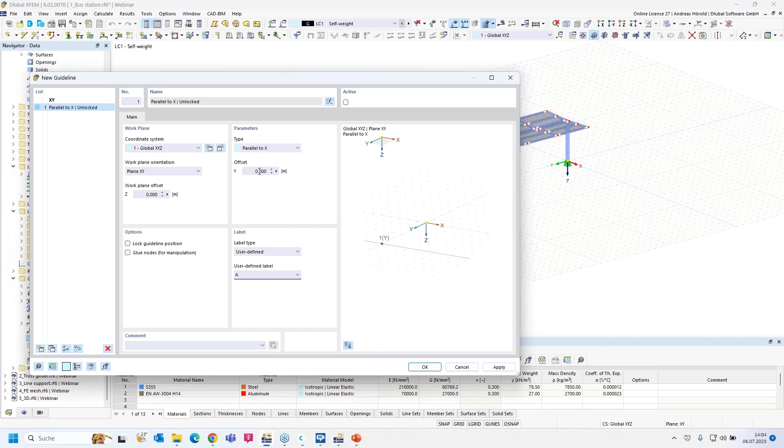Okay, we start with the first guideline. We call it A, parallel to X, and we start with an offset of 0. Apply, and you can see in the RFEM window that the first guideline is created. We activate it, and then we copy the guideline, and we have to change the offset.

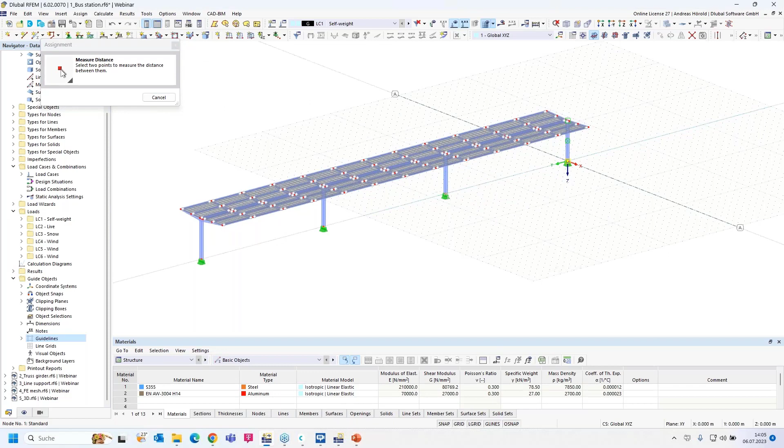Let's measure the distance between the two columns here - okay, 18 meters - and we have to rename the guideline. Apply. Okay, then we create the other guidelines with the same workflow, 36 meters, and we rename the guideline.

Apply. So, and then the last guideline - I change only the offset and the name. Okay, so all the guidelines in the X direction are created.

Now you can see the distance between the name of the guideline and the node is very far. You can change that - for example, when you change the grid, here by a right click you can press edit, or I leave the dialog and show where you can find it as well, under tools, work plane, grid, snap, and so on. Okay, then you can enter distances here.

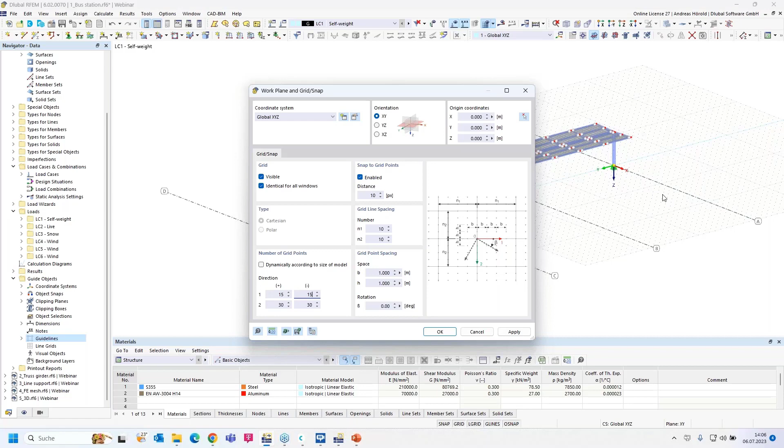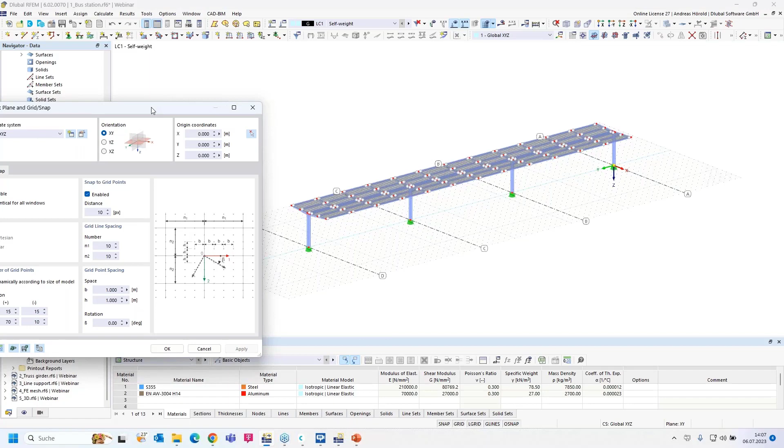15 plus and 15 minus in the X direction, in this direction, and for example 70 and 10 in the Y direction. I apply, and you can see the name has been moved to near the node. You can also check dynamically according to size of model - let's do that - and you can see that the number of grid points are created automatically.

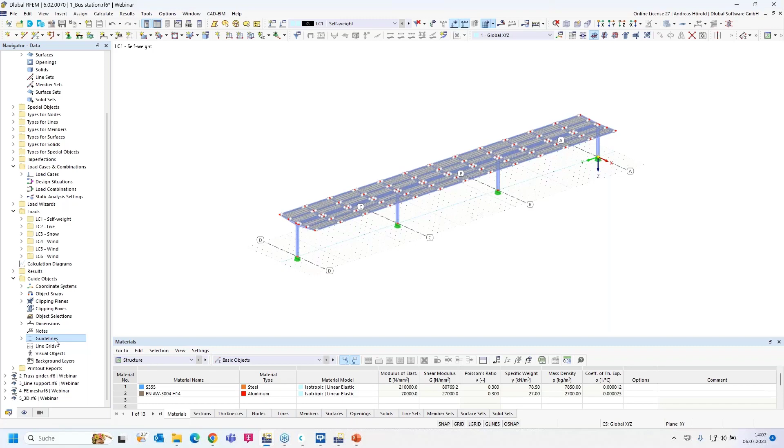Now let's create the last guideline in the Y direction. I create a new guideline, parallel to Y, offset 0, and a user-defined name - I name it 1. Apply that. Now all is okay.

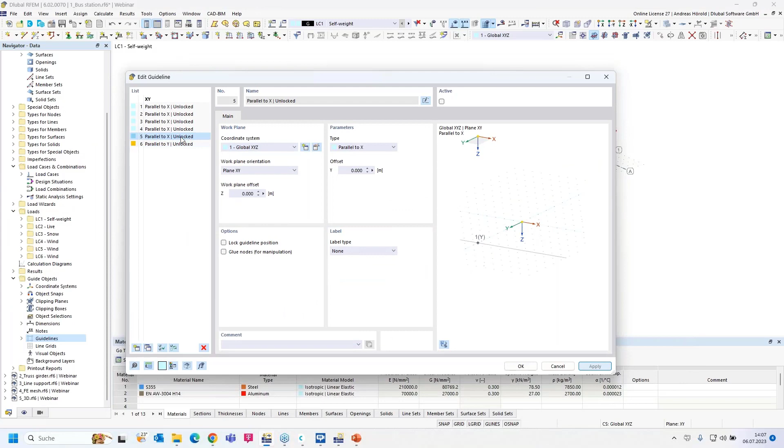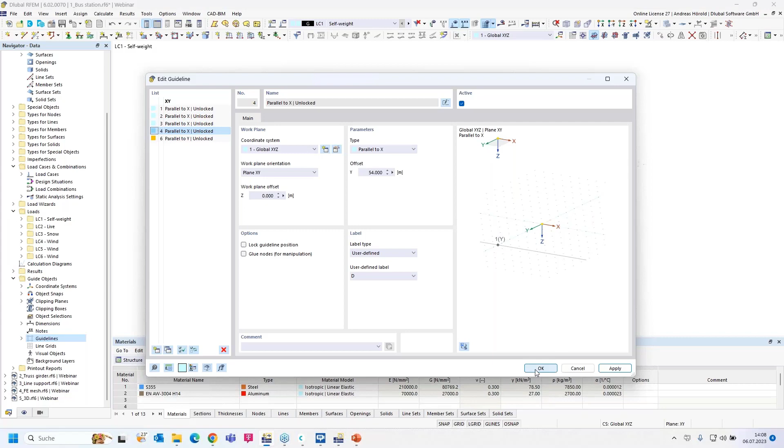No, this one is not correct. Now you can move, copy, or delete all the lines here, or certain lines. Now our guidelines are created - just an example. So then we turn to the next model and the next question.

Next question is: I came across the area of load application setting in the load wizard. How does this setting affect the magnitude of the load in my model? So this is a load that has been created with the load wizard. I double click on it, and you can see that dialog.

And how you can create such a load, I will show that. First, you have to select in the base data here, left at the top, under add-ons, the load wizard must be activated - but this is a default setting. The combination wizard and the load wizard are selected by default.

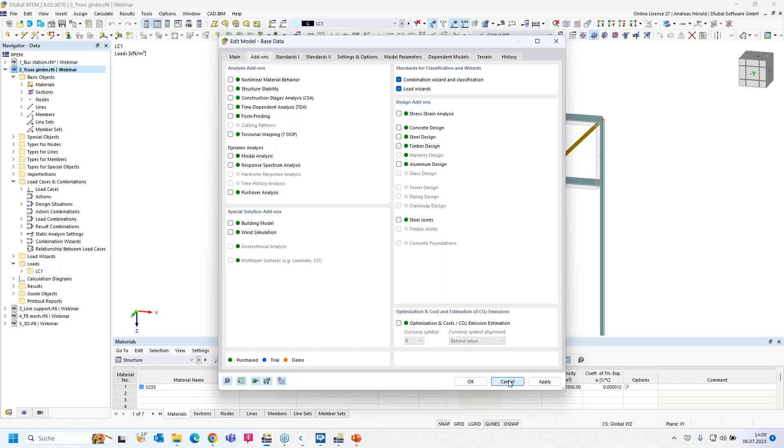And then here on the left side at the top, insert, there are the load wizards. There are different load wizards - member load from area load wizards, for example. This is the load that I created before, which you can see in the model. There are also the snow load wizard and the wind load wizard, for example, and other wizards.

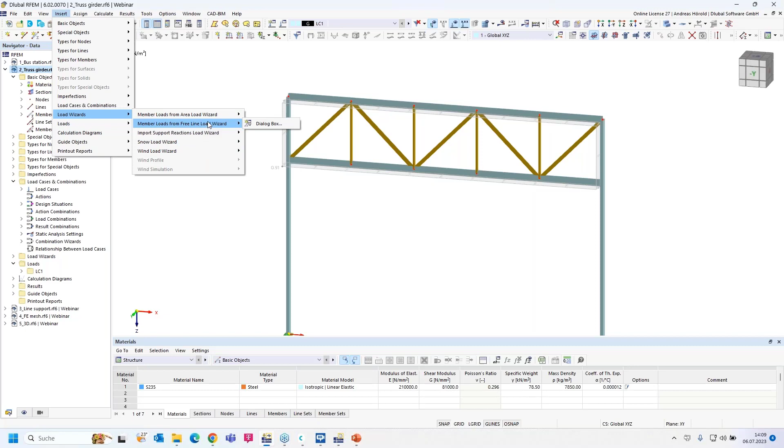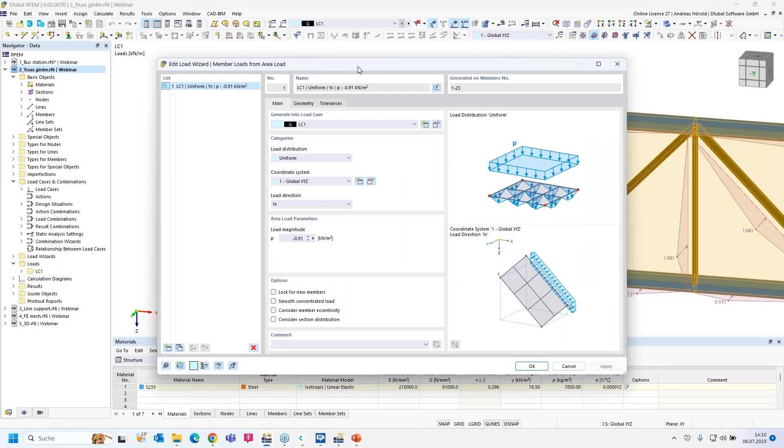I double click on it, or let's display it separately. Now with a right click, I can display the loads separately. And now I double click on the load, and I open the dialog. Under geometry, you can see this setting: fully closed plane.

The complete plane - where there's, for example, a plate or trapezoidal sheet over the members - and all members get a load, and the wind can affect the full area here. So, if you want only the members to get a load, only this small area, then...

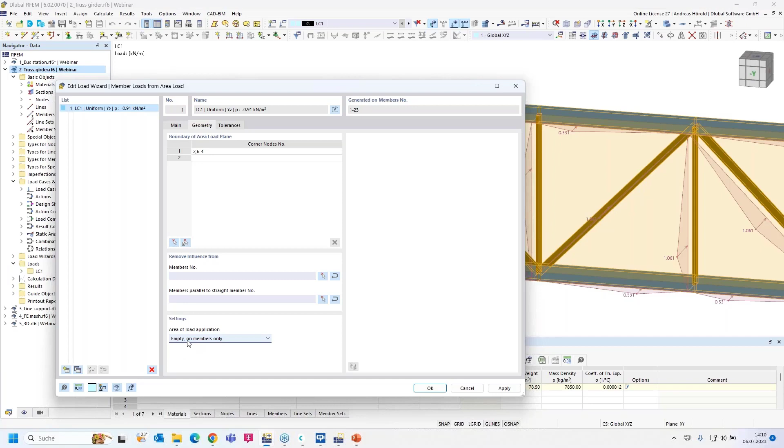...you have to select 'empty on members only.' We can see that at the moment the vertical and the diagonals get a load of about 1 kilonewton per meter, and if I apply that, you can see that the load is, or has been, decreased. Only the members are affected by a wind load.

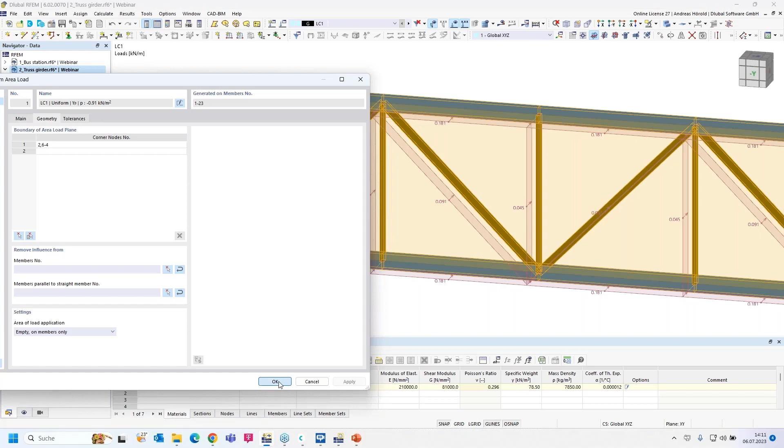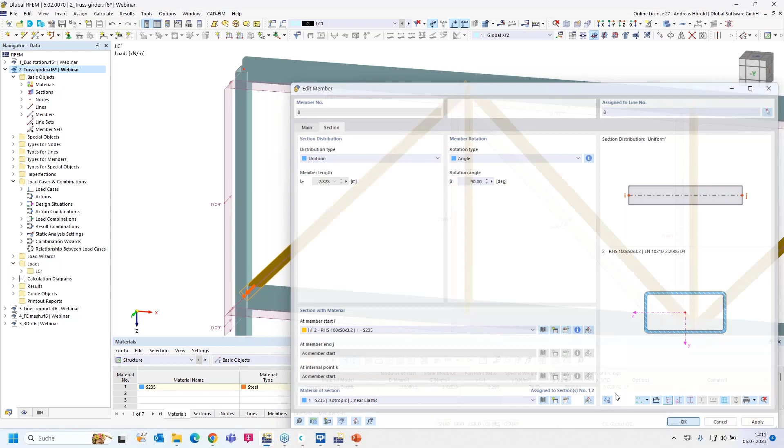So, if you, for example, change that member - at the moment the width is 10 centimeters or 100 millimeters - and if I rotate the section, for example 90 degrees, you can see the load has decreased from 0.1 for this diagonal, and now it's only half of this value.

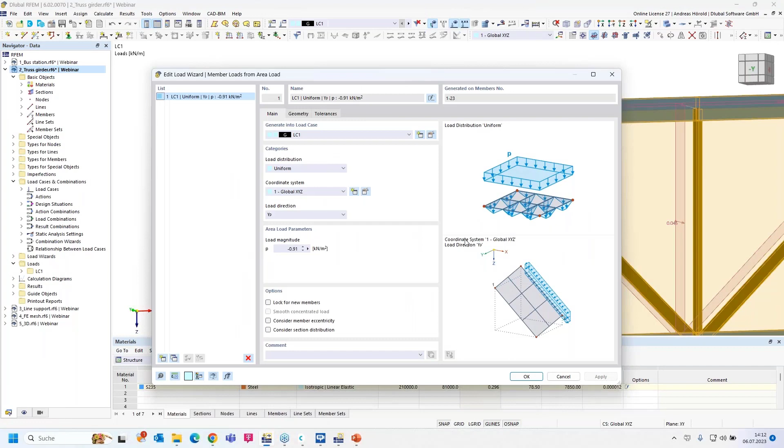Okay, that's the setting. I changed that back, or I press undo, and you can see now the load is 0.1, or about 0.1. And I'll do another change.

Imagine that, for example, a trapezoidal sheet spans from the lower beam to the upper beam, and only these beams are affected by the load, or support the trapezoidal sheet. Then you can remove the influence from members parallel to straight members. I select all 3 members, and all members parallel to these 3 members don't get a load.

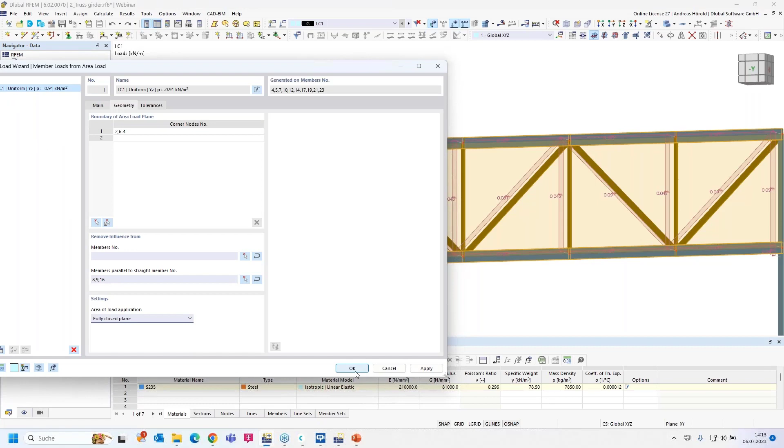Let's try that - fully closed plane. Okay, so now that's the effect when a trapezoidal sheet spans from the lower to the upper horizontal beam.

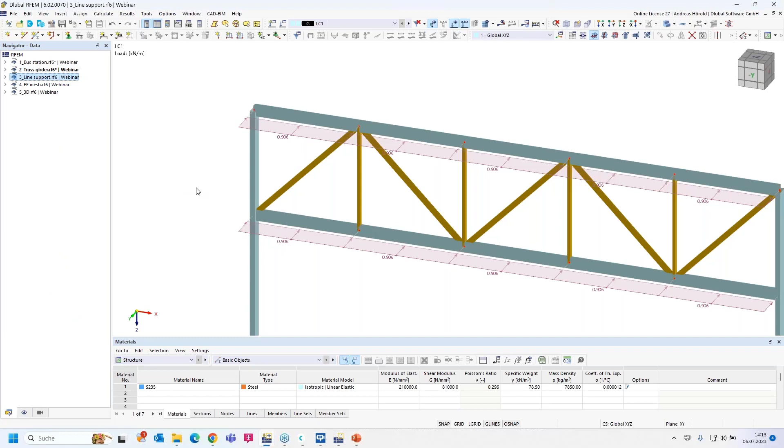Let's turn to the next model and the next question. A surface model, a concrete slab from a building, for example. And the question is: can I get the program to calculate the spring of a wall for line support without modeling the wall?

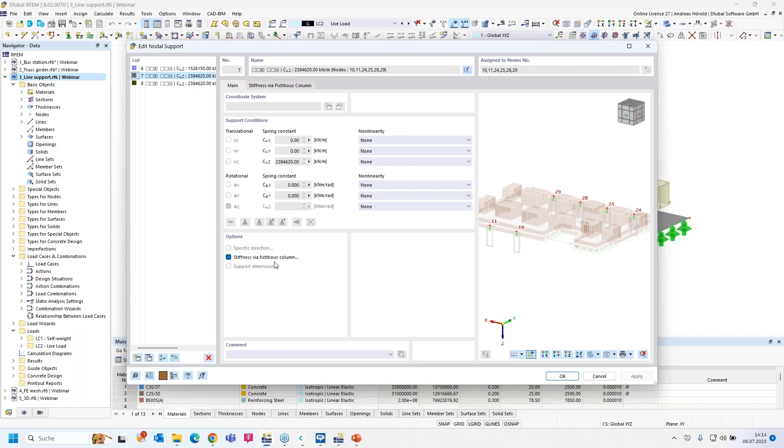In an earlier webinar, we showed a similar function or feature for the nodal supports. Let's double click on this nodal support, and when I press the edit button, you can see where 'stiffness via fictitious column' is selected. And when I turn to this dialog...

...I can see the model is supported by elastic surface foundation, elastic nodal support, and so on. You can enter dimensions, the height, and so on. Then if the column head is hinged or semi-rigid, and when you change that, the values for the springs are changing.

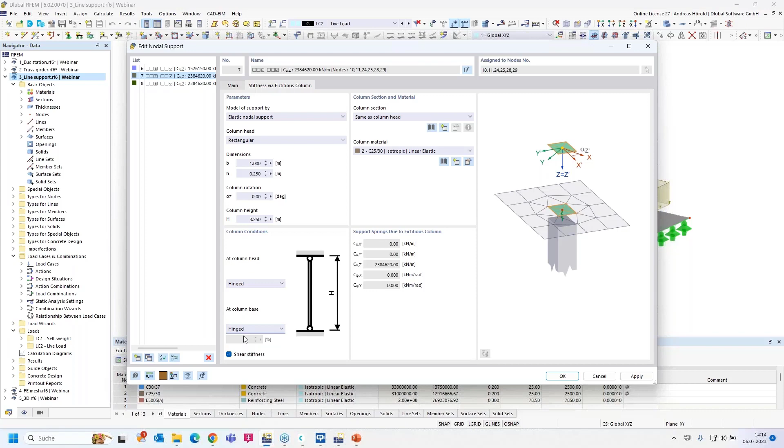Okay, so I leave the dialog, and we have got a similar function for the line supports. I double click on the line support and edit all the used line supports. Now you have to check the stiffness via fictitious wall. In the preview, you can see the walls already.

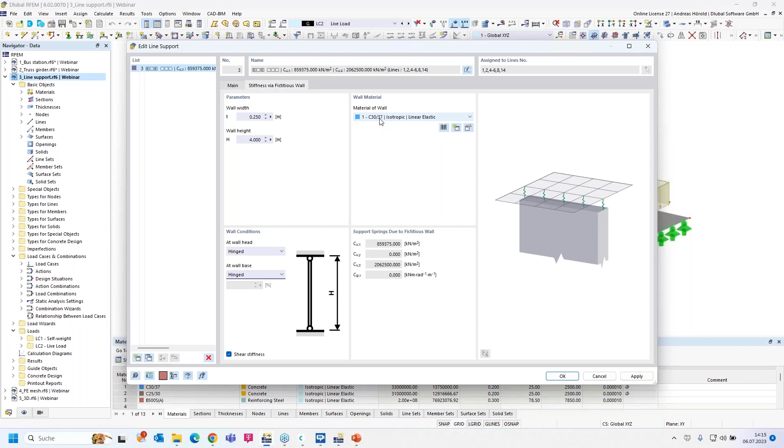So then you can enter a thickness of the wall, a wall height, and whether the wall head is hinged or rigid. Also for the wall base, you can enter a material. I'll leave the concrete material as it is at the moment, and you can see, as I mentioned, the considered wall in the preview.

Okay, and now you can see also springs for the line supports here, and this can avoid or smooth singularities in the FE calculation. That's the advantage.

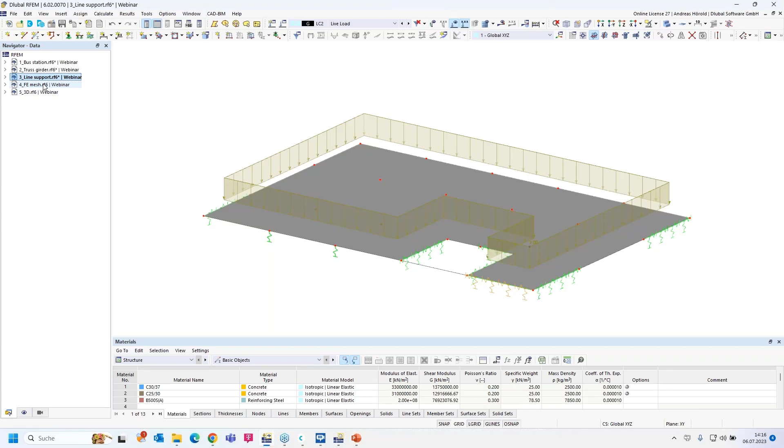Okay, that should be all to this question and to this model. We turn to the next model and the next question: how can I create multiple FE elements across the thickness of elongated thin solids without having to create an extremely fine FE mesh? At the moment, you can see a steel plate here with a thickness of 20 millimeters.

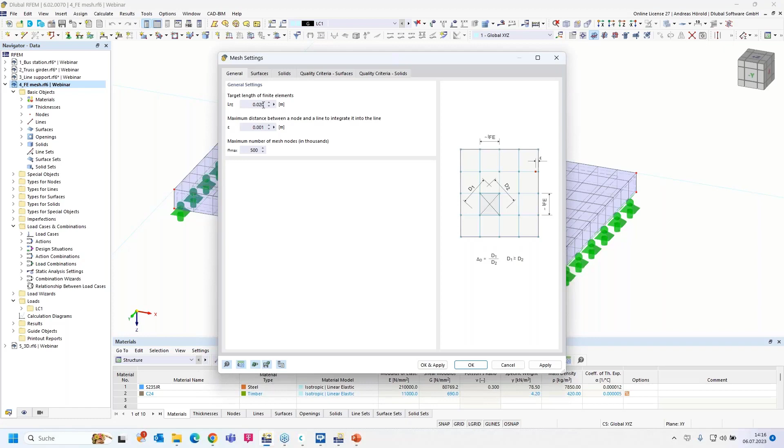I can go to the FE mesh settings. The FE mesh size is 2 centimeters, 20 millimeters, that's the thickness of the steel plate. And you can see for the width and the length, the size of the FE mesh is quite okay, but not for the height—there's only one FE mesh.

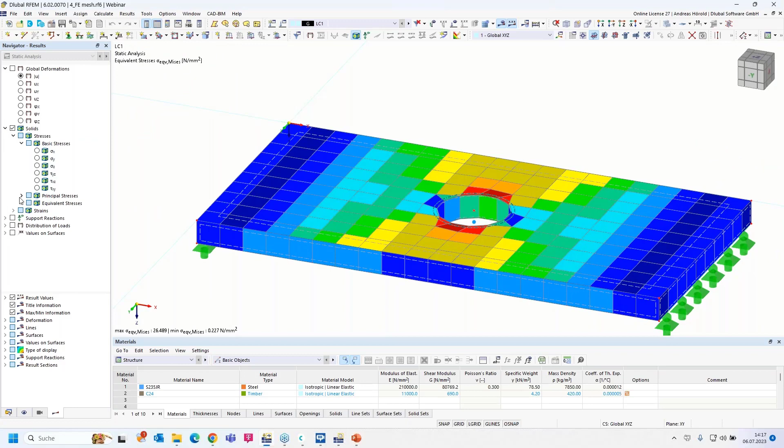You can see that in the results. There's only one FE element, and the results in that case, what is selected, the equivalent stresses, the sigma von Mises, and that's not okay.

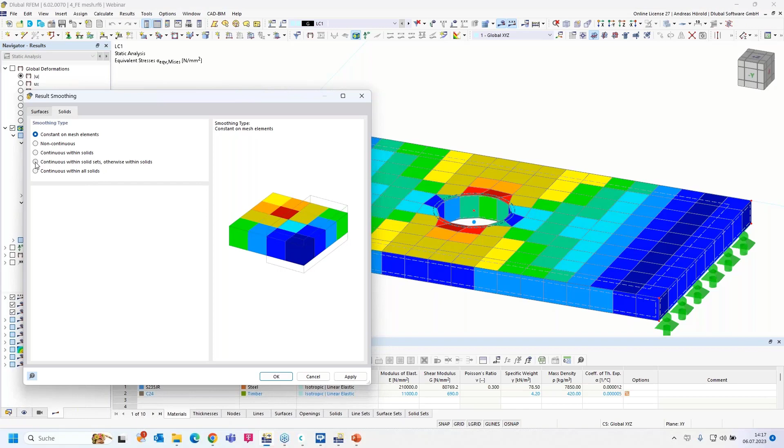For your information, under calculate you can find the result smoothing, and at the moment there is no smoothing. You can see that here, constant on mesh elements—those are the real results without smoothing. That looks quite better, but those are the real results, the constant on mesh elements.

So I double click on that point here to get into the dialog from the solid. Another possibility would be to go on the left side to the navigator data at the bottom, then open the solids—there's only one solid. You can double click on it or right click and edit, and the same dialog has been opened.

So I increased it to 4—at least 4 or 5 mesh or FE elements should be used for one distance here, in that case for the height or for the thickness.